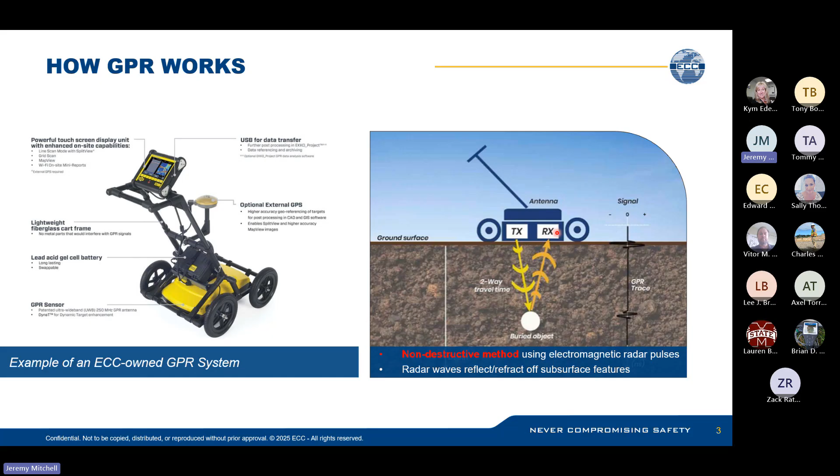So a big distinction, this is a non-destructive testing method. So this image here on the right kind of shows a 2D representation of what's happening. So as you push the antenna across the surface, there's a transmitter that's emitting electromagnetic radar pulses. Those pulses travel uniformly through the subsurface until they meet a different type of material. When that happens, it's reflected or refracted off of that material back to the receiver, which is then interpreted by the control unit.

This slide is intended to show the different form factors for GPR. Not every GPR system looks exactly the same. The image on the left here, we did a ground penetrating radar survey out in Guam on Andersen Air Force Base. We were locating subsurface utilities. This top middle image shows a concrete scanning system where they're mapping out the concrete reinforcement. And then again, this Wake Island photo, which is a more compact version, easier to travel with, which is why we chose that for Wake Island.

And then this bottom image is an example of a towed array system. I built this custom system for a project a few years ago in Colorado. And that was just to speed up the survey.

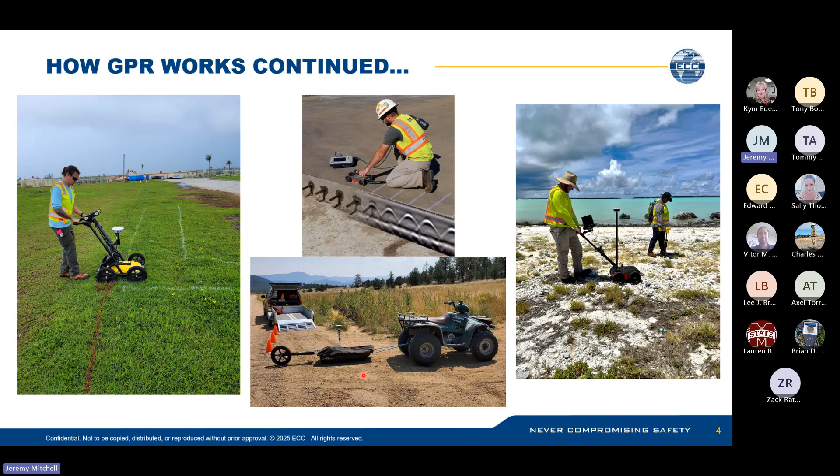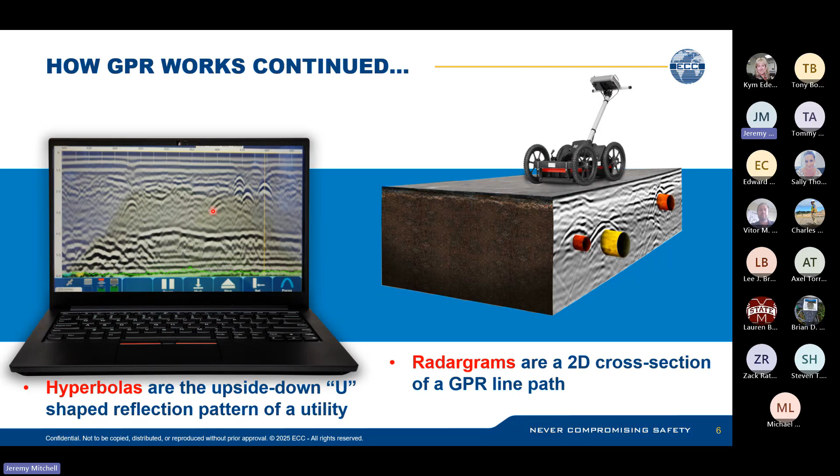Here's some examples of what GPR can detect. This is not an exhaustive list, but it is maybe some of the more common features. So metallic utilities, of course, non-metallic utilities we can detect. However, the distinction there is these are oftentimes more difficult than metallic. So GPR relies on a contrast to detect things. So metallic utilities show up really good because the contrast between metal and, say, sandstone, for example, is pretty great, but a PVC pipe may not be as easily detected.

And then concrete reinforcement. This is pretty common in the GPR industry. Oftentimes, contractors need to know where they can core drill or saw cut safely to avoid cutting through rebar or post-tension cables primarily. There's a lot of safety concerns surrounding post-tension cables. Beams, wire mesh, you can get some slab thickness information as well as moisture intrusion and cracks.

And then for geotechnical and soil features, such as voids, sinkholes, you can get stratigraphy information, if you need to find fill material boundaries or depth to bedrock information, as well as utility trenches. And then for some of our environmental and archaeological surveys, that might refer to an underground storage tank survey, buried drums, septic tanks, even graves or buried debris, foundations, and then cultural artifacts.

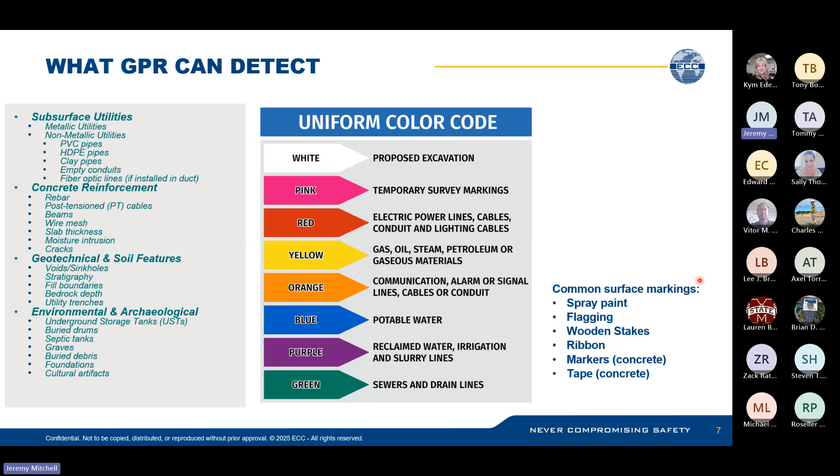This slide here shows some real life examples of GPR in practice. So I took this top left photo of a concrete scan that I did for a client who simply needed some safe locations for core drilling. So I just mapped out the reinforcement within the concrete slab itself, gave them some safe locations for that.

This top middle image, this is an example of a three-dimensional GPR survey. So this client had an asphalt parking lot where water was seeping through the cracks in the asphalt. So I went out there, we determined that there were no water lines in the area, which kind of confused us at first. So I decided to do a 3D survey, which consists of laying out a 3D grid, collecting data in both the X and the Y direction.

And then that data is taken to the office and post-processed. And what we determined was, the way that you can interpret this image is everything in red is competent asphalt. And then in the middle here, you can see this blue and green. That's where the water intrusion was taking place.

And so I did a little bit more digging, and it turns out that there was an intermittent stream that historically had run through this site, kind of north-south here. And this particular year happened to be one of the rainiest in several decades. So this underground stream had reemerged essentially, and that's what was causing this issue. So we used GPR to delineate that problem area. They were able to excavate and mitigate that.

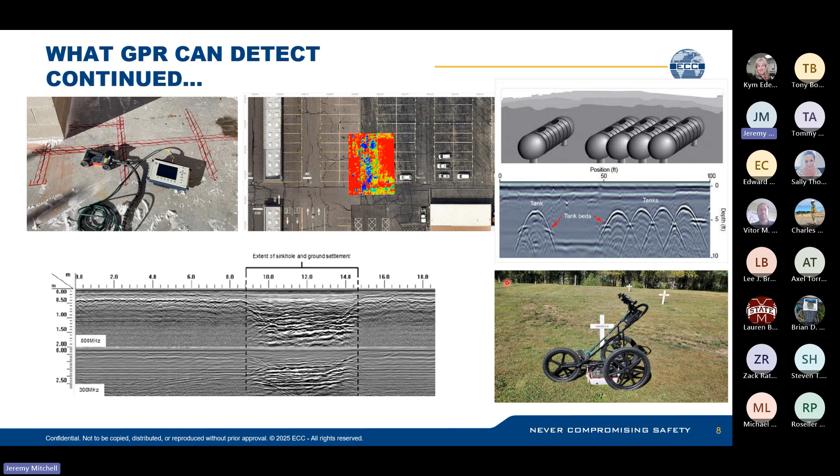And then this bottom right image, this is a more somber project that I conducted for the Southern Ute Indian tribe in Southwest Colorado. They had hired me to come out and try to identify the location of a mass burial from the internment camp days. So this image here shows me actually calibrating my system to a known grave, and we ended up finding the mass burial, this back area over here.

So some of the GPR limitations: again, GPR is not a magic device. It cannot detect materials by type. You can't program it to look specifically for a PVC pipe. It only can detect materials by contrast. So the greater the contrast, the better your odds of detection are. Wet clay soils, we can generally assume that you're going to have poor depth penetration and by default, poor resolution in the data set.

For deep, small targets, a general rule of thumb for utilities is you need 1 inch diameter per 1 foot of depth. So, if you're looking for a 3-inch pipe, maybe you can see that reliably down to 3 feet. There's a lot that goes into this, so it's a general rule of thumb. A geophysicist or GPR operator may be able to look at the site-specific conditions and give you a better estimate. But if you just need a general rule of thumb, 1 inch diameter for 1 foot of depth.

And then for antenna frequency limits, a high frequency antenna provides really good resolution, but less depth penetration. So sometimes with concrete scanning, you may get great resolution, but only to 12 inches. The opposite is also true for low frequency. You've got better depth penetration, but less resolution. So these are situations where you're probably looking for something pretty large that's pretty deep below the subsurface.

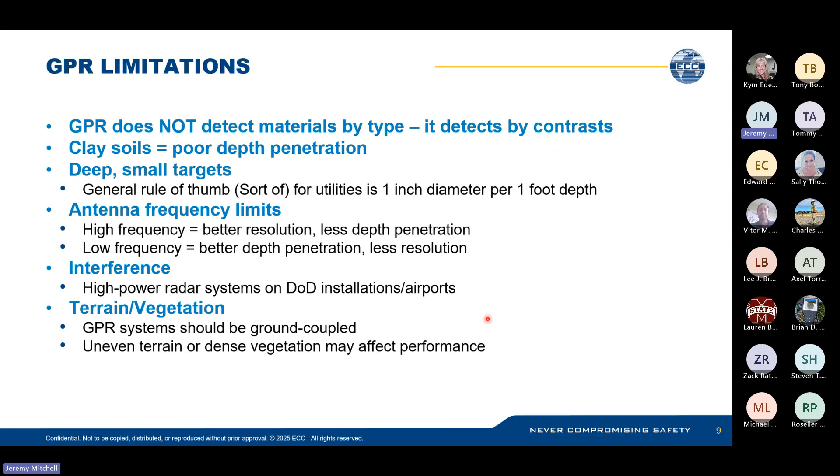We can identify unrecorded lines. Oftentimes I've seen contractors, when they do have a utility strike, they're relying on utility maps that may be outdated or incomplete. Just as an example, I know at ECC we do a lot of work on DoD installations. There's not been a single DoD installation that I've done GPR on where their utility maps were accurate. So keep that in mind as we plan our project sites.

And then, of course, we can detect voids in advance to prevent a collapse when bringing heavy equipment. We can keep our employees that are digging safe by locating live electrical or gas lines to prevent explosive risk. We can use GPR to improve our confined space and excavation planning, which also enhances our pre-task hazard analysis. So all of these things can increase project safety on ECC project sites.

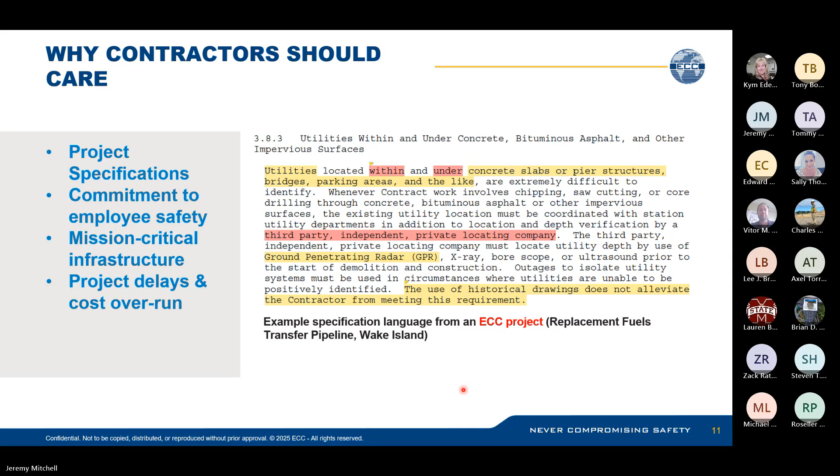So what you should know, if you're ever in a situation where you need to subcontract or plan out a GPR survey, here's some best practices when doing so. We should ensure ahead of time that the survey area is clearly defined to the best of our ability. Any information that we can provide the GPR operator on target depth, diameter, or composition will help determine the effectiveness, as well as the surface type: is it asphalt or native soil? And then we want to clear and demarcate the survey area ahead of time.

And then sometimes we want to verify the insurance coverages and contract language. Oftentimes, if we're subcontracting a third-party utility locate service, they're going to have contract language that tries to absolve them from any liability or risk, just due to the simple fact that sometimes utilities are not detectable, so they don't want to take that risk, and we need to understand what that risk means for ECC.

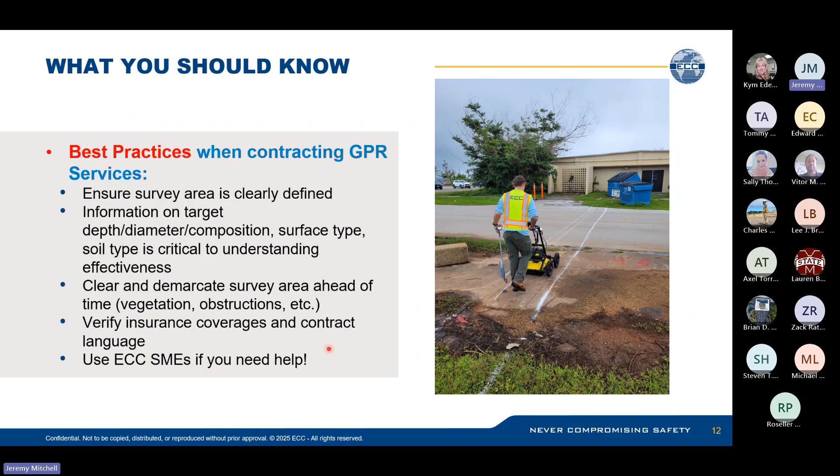And then lastly, use ECC subject matter experts like myself if you need help. Reach out. I'm always happy to talk through some GPR surveys, design, or what may or may not be feasible on your project site. And at ECC, we own two GPR systems internally, so we can also perform some of these surveys depending on location, resource availability, etc.